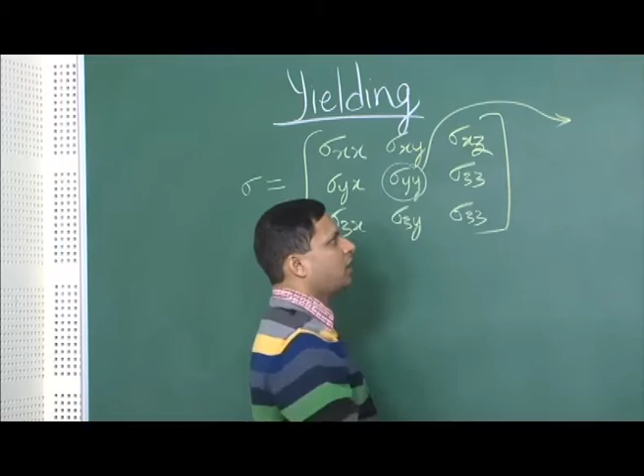Now, when we are talking about a simple tensile deformation condition, only one quantity exists, sigma yy, and we know from our simple tensile test that when this value reaches y, the yield strength of the material, then we say the material has started to deform. But how do we talk about yielding or the initiation of plastic deformation when more than one of the components of this matrix is non-zero? In this particular case only this was non-zero, everything else was 0.

What about if more than one term is non-zero? Let us say this is non-zero and there are some more 2 or 3 terms which are non-zero, then how do we define that deformation has started or begun?

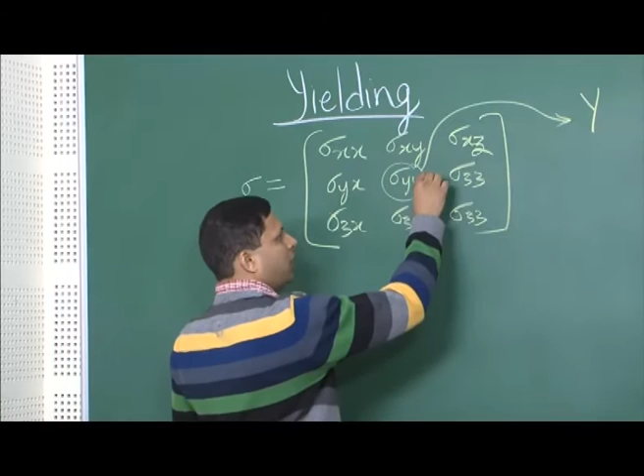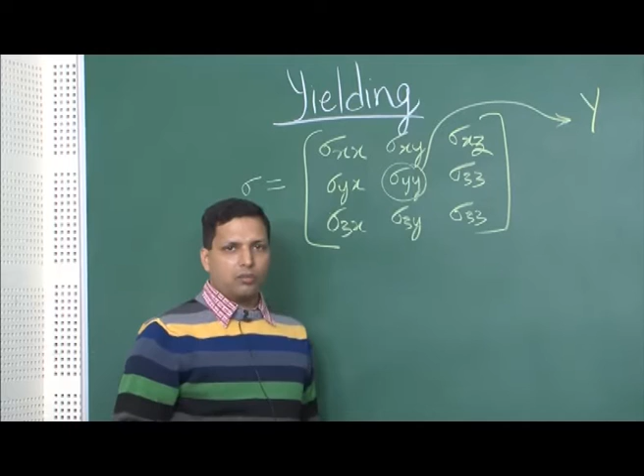Either you can think of a very simplistic model where you would say each of these values should reach a certain point, and then we will be in a position to say that yielding has begun, but that is not corroborated by our experimental results.

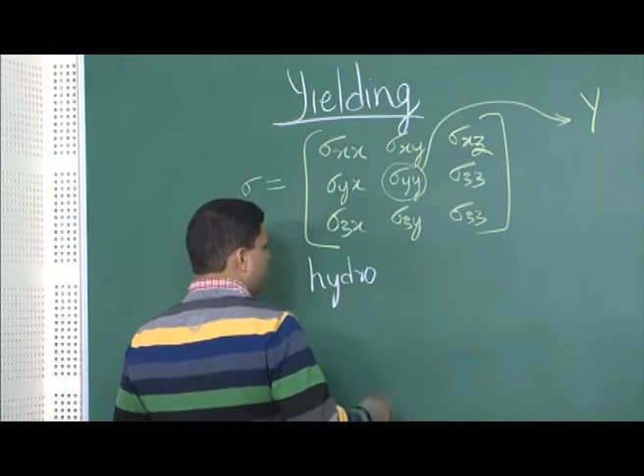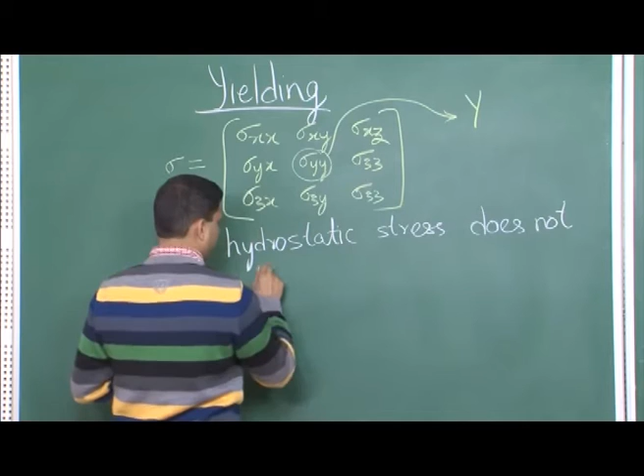Experimental results have shown us that it is a hydrostatic stress, so the hydrostatic stress does not influence yielding. And only the overall shear stress, not a component, is what influences yielding.

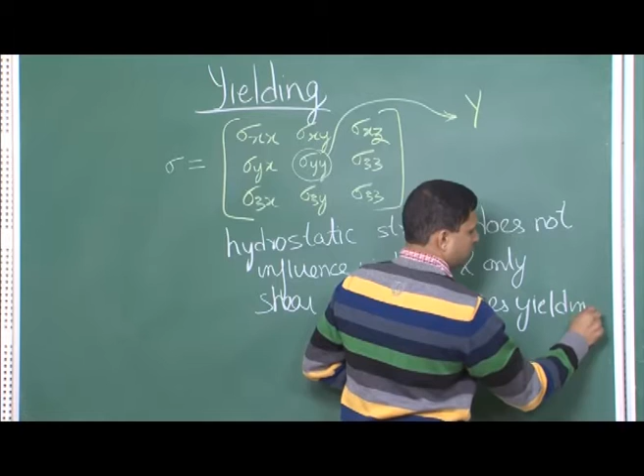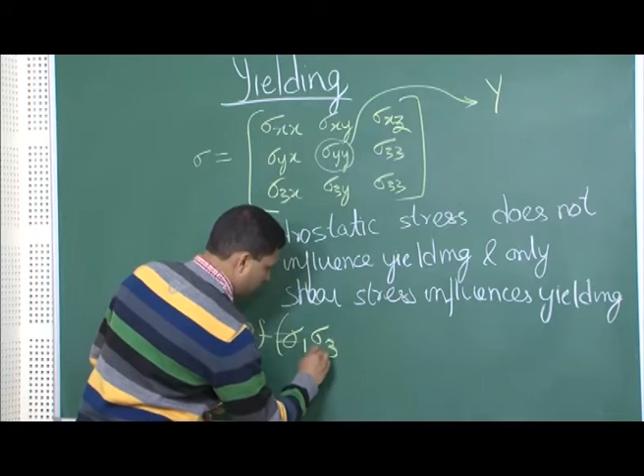If we take this statement into account, then we can say that this function, which is a function of shear stress, let us not write it as like this: sigma 1 minus sigma 2, sigma 2 minus sigma 3 and sigma 3 minus sigma 1.

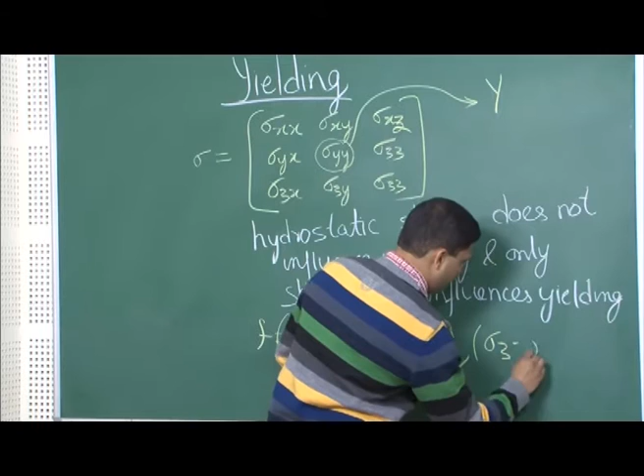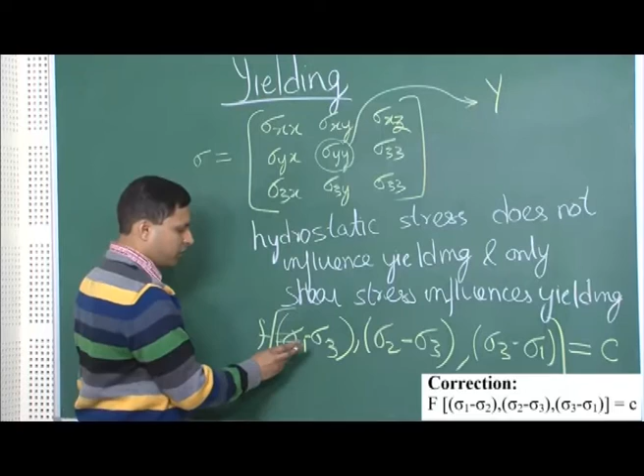When this function reaches some critical value c, we do not know what this function is right now, but all we know is that it has to be a function of shear stresses, and if we look at the shear stresses in terms of principal stresses, then sigma 1 minus sigma 2, sigma 2 minus sigma 3, and sigma 3 minus sigma 1 all represent the 3 shear stress components.

So now we have a form of the equation in terms of shear stresses, and when this function reaches a critical value c, then we will say that this is plastically deforming, or yielding.

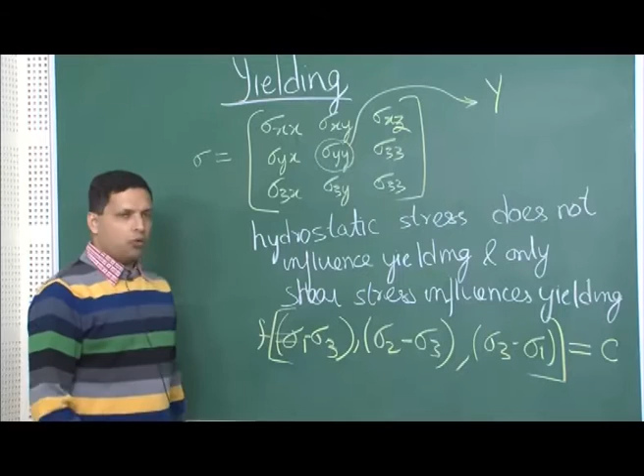Now the next task is to find out what this function is, which has to reach this critical value. We know it is a function of shear stresses, but we still do not know the exact function, and to get to that exact function we will have to put some constraints, get a formulation, and then verify empirically whether this particular criterion holds true or not.

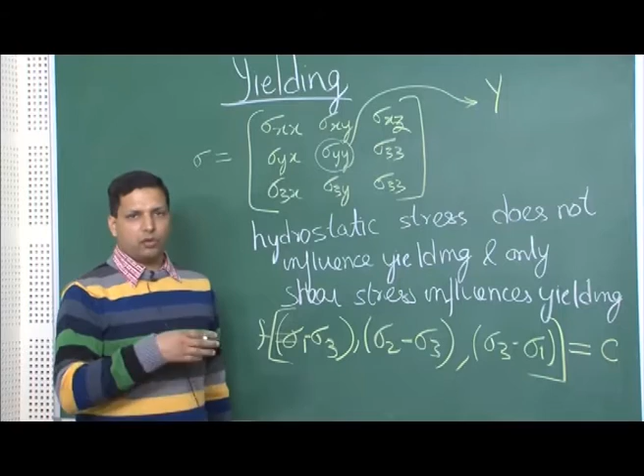It may be that certain materials will follow one kind of criterion, other materials will follow another kind of criterion. So coming back to certain assumptions, what are those assumptions or constraints that we need to put so that we can formulate some criterions?

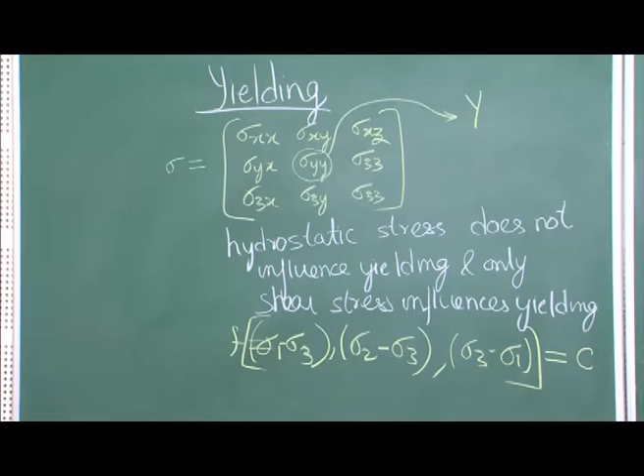First and foremost is no Bauschinger condition or no Bauschinger effect. What is the Bauschinger effect? It is when you have different behavior in tension and different behavior in compression. So what we are saying is that it should not be there, meaning behavior should be similar whether we are talking about compressive or tensile, and that would mean that the relation we get will be symmetric with respect to plus or minus sign, because plus and minus sign are what reflect whether it is a tensile or compressive stress.

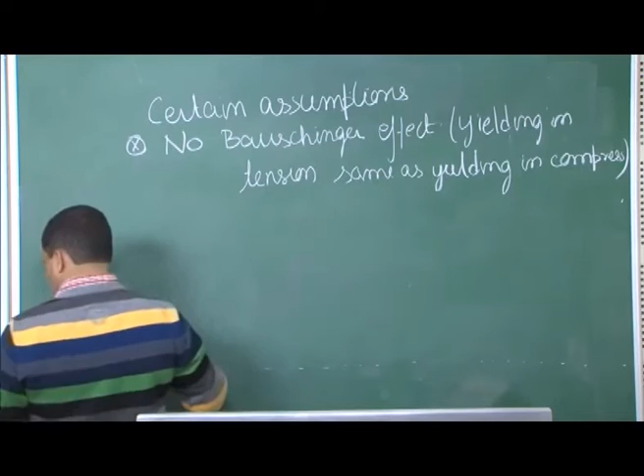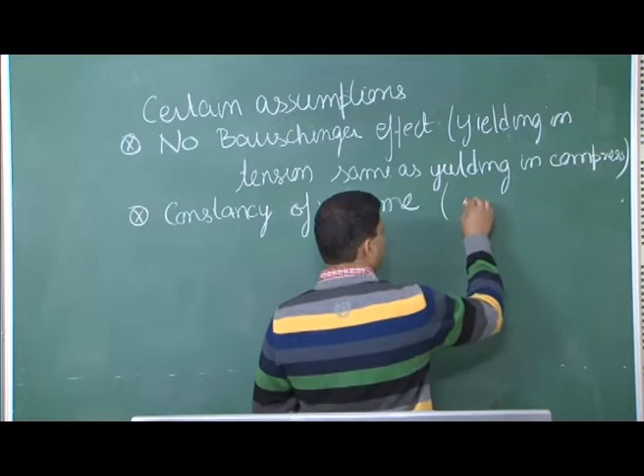What is the other assumption? It is non-compressibility, or constancy of volume. So we are assuming it is plastic deformation and a material which does not compress upon deformation. Therefore, if you look at the total change in volume, it should be 0, and from that you can easily show that Poisson's ratio should come out to be 0.5.

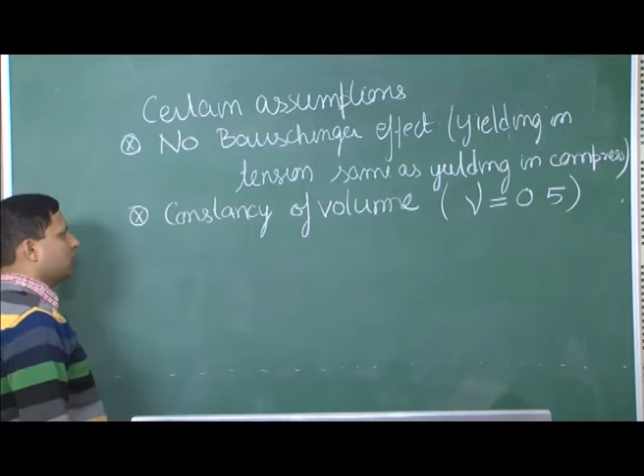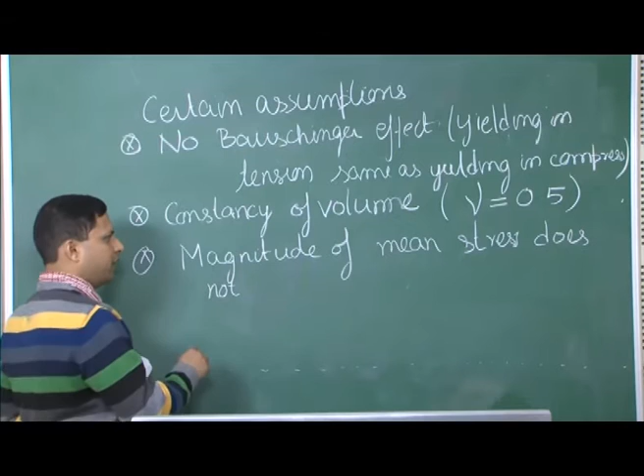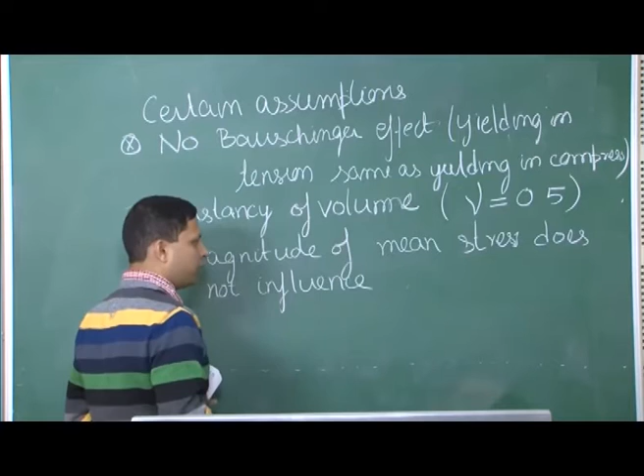And we will actually look at one example to understand this. So this is another constraint, and the other is that the magnitude of mean stress does not influence yielding. Now we have already stated it in a much more general way, but to formulate this relation we are taking a more defined approach and saying that magnitude of mean stress does not influence yielding. We have already said that hydrostatic stress should not influence yielding, and now we are putting it in a more specific term that mean stress should not influence yielding.

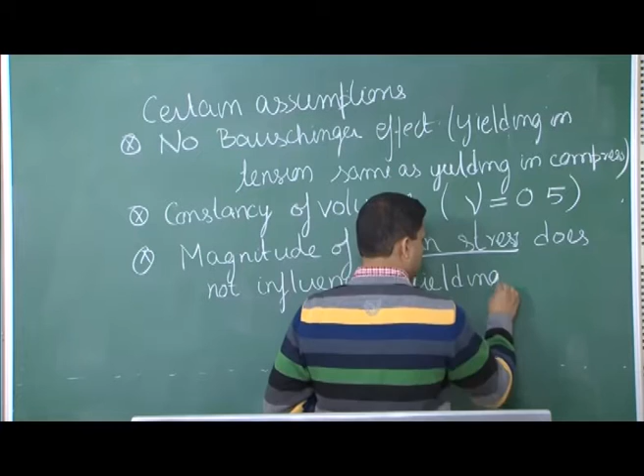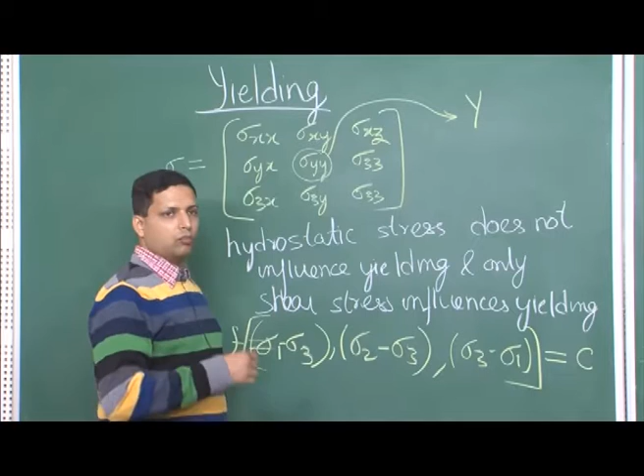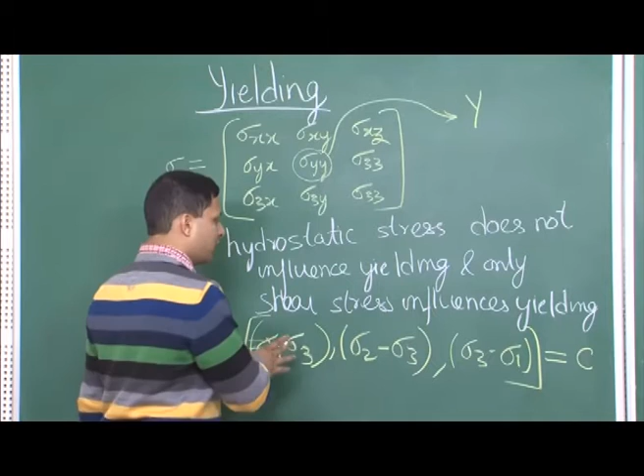So, if we take these into consideration, and the fact that we already know it is a function of shear stresses, we have a few more things to say. Before we put those constraints formally, let us look at what the Mohr circle will say about the constraints we have put, about the fact that the magnitude of mean stress does not influence yielding, or that hydrostatic stress does not influence yielding.

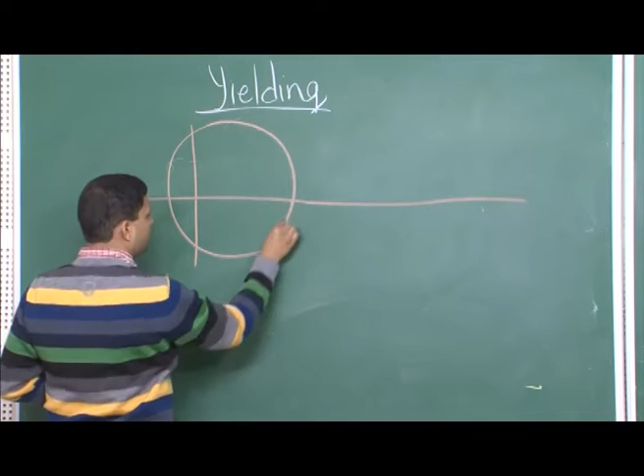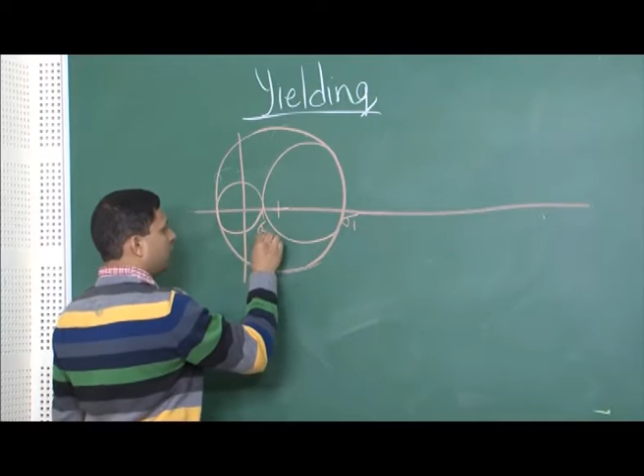So let us look at a simple Mohr circle to explain what we have just written. All the talk we have covered can be much more simply represented, as we have done earlier, by a simple Mohr circle. Let us say this is a Mohr circle representing the yielding condition, at this particular condition it is yielding, and there are multi-axial stresses, so we are drawing 3 circles. Now there is sigma 1 over here, sigma 2 over here, and sigma 3 over here.

Now, what is the hydrostatic stress? It is the sigma xx, sigma yy and sigma zz, and the mean of these we can find out very easily. For example, if we are talking about stresses in this direction, the mean of this will be... okay, so this is the element where we have this particular stress condition.

Now, if this same element were also imposed with some additional hydrostatic stress, let us say this is sigma m equal to this. So now each of these stresses is added by this amount sigma m, and let us say it has now moved to over here.

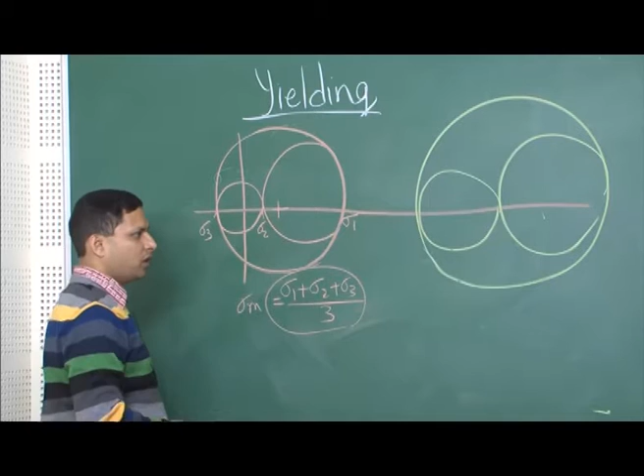So the size of the circle remains the same. Even though the drawing may not be able to convey it accurately, remember this circle is the same in diameter as this one and this one. Just keep in mind we are trying to draw it on the board, so it may not come out accurately, but the fact is that the size of the circle remains the same. Only the overall placement of the circle has changed—the circle was placed over here and now it is placed over here, everything else remains the same.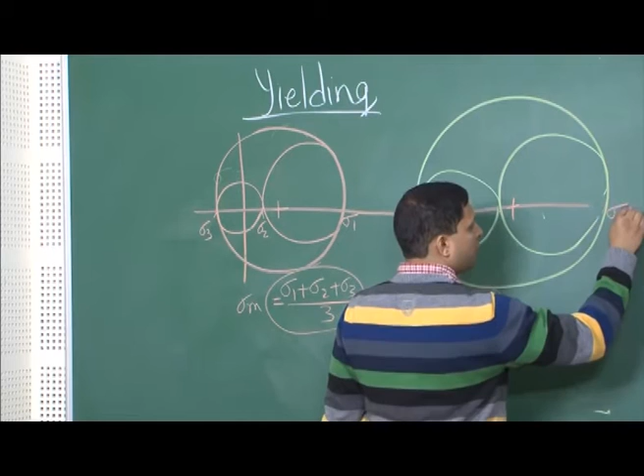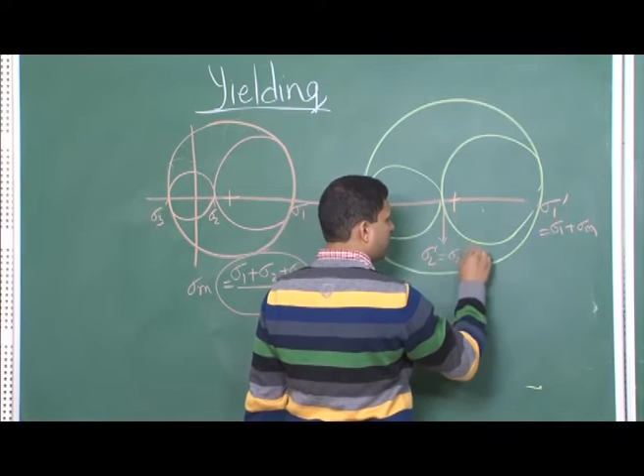So now similarly here, this is your new sigma 1 prime which is equal to sigma 1 plus sigma m. Similarly, this is sigma 2 prime which is equal to sigma 2 plus sigma m, and this is sigma 3 prime which is equal to sigma 3 plus sigma m.

Now, what all of this means, in simple words, is that if yielding is taking place over here, it is also taking place for this one. If yielding is not taking place here, yielding will not take place even for this condition. So just imagine, let us say yielding is not taking place and sigma 1, sigma 2, sigma 3 are some values. Now you have increased those values by a significant fraction.

You can keep increasing it no matter what, as long as continuum mechanics holds for that stress, which would mean you can keep shifting this circle all the way on the positive x-axis, or on the other hand you can keep shifting it in the negative direction where you are applying compressive stresses. So you can keep shifting it in the negative x-direction, but yielding will not take place if yielding is not taking place over here.

So the absolute magnitude of sigma 1, sigma 2 and sigma 3 does not influence the yielding. What is only going to influence the yielding is the size of the circle. Now, as we have already mentioned, the size of the circle is the same here and here, no matter wherever you take it on the x-axis. So as long as the size of the circle is the same, whatever is the yielding state here, it will remain the same for there.

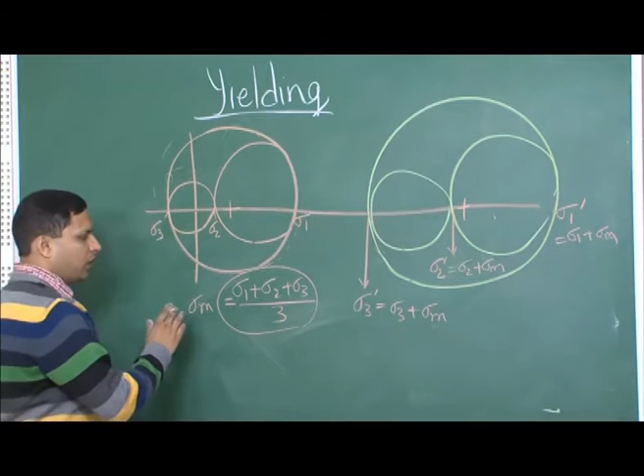If you are changing something which is causing the size change in the diameter of the circle, that is the only thing that can actually change the state of yielding. So let us say we start with a very small circle, yielding is not taking place. Keep increasing it, and there may be some critical size at which yielding takes place. As soon as the circle size reaches this value, the material starts to deform plastically, and anything beyond that, the material has yielded. So what we can say is that it is the size of the circle that determines yielding.

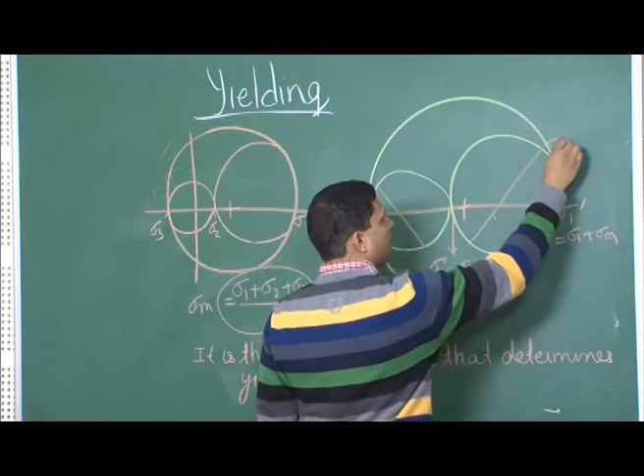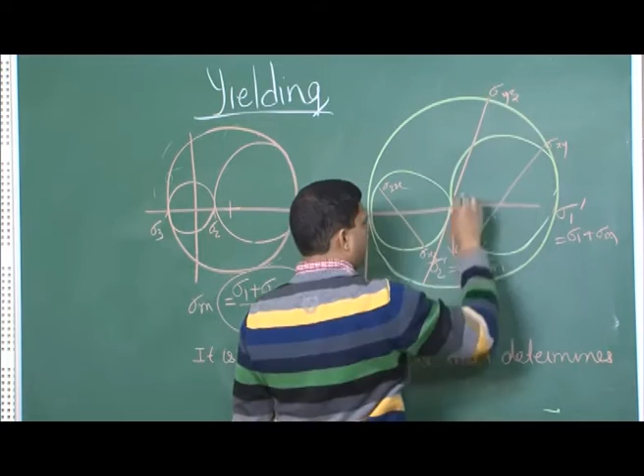Remember, if you keep moving it, if you keep the placement different and keep the size same, nothing is changing in terms of yielding. Although the absolute value of hydrostatic stresses has increased, you have added some quantity sigma m to all the principal stresses, or it may even be at some particular angle, so you may have sigma xy, sigma yx, sigma xz, sigma zx, and similarly sigma yz and sigma zy. All those stresses would have increased in value, the normal stresses have increased in value, but the yielding condition has not changed.

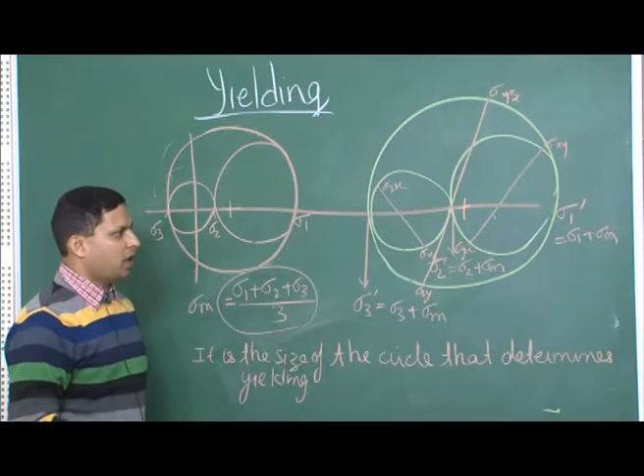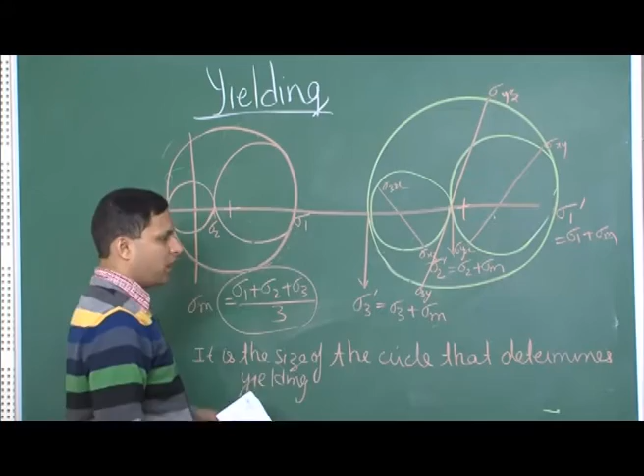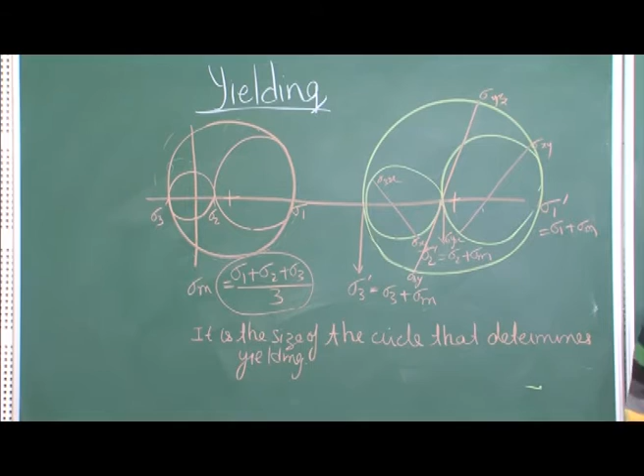That is a very important understanding, and now based on this we will look at two different yielding criteria. Like we said earlier, yielding is defined by the difference between the principal stresses, because difference between the principal stresses are nothing but shear stresses. So we have said F, sigma 1 minus sigma 2, should reach some critical value. This is what we have done so far.

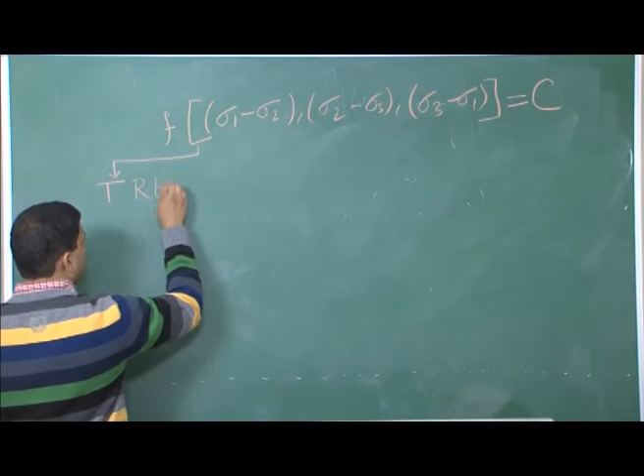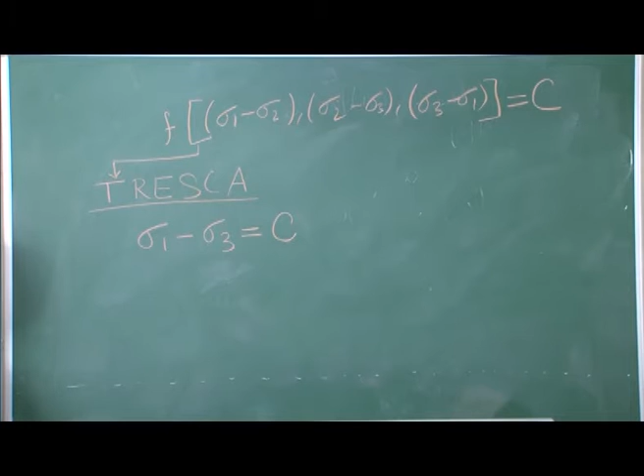Now people have come up with two different criteria. One of them is called Tresca, and like I said, you can come up with any number of criteria, and maybe different materials will follow different criteria, as long as they follow some of those constraints and the fact that mean stresses should not influence yielding. So what is the Tresca criterion? The Tresca criterion says that when sigma 1 minus sigma 3 reaches a critical value C, yielding will start to take place. So this is the defining equation for the Tresca criterion.

Now, as of now we do not know C, we do not know how to relate it with other known properties of the material. For example, you can do a simple tensile test and get the yield strength of the material. You can do a simple shear test and get the shear strength of the material, given by the symbol K. So how do we relate C with those known quantities of the material, and what will be that C value? To do that, we will simply take a tensile condition, put the material in a tensile test, and find out the value of sigma 1 and sigma 3 in terms of y, and put it over here.

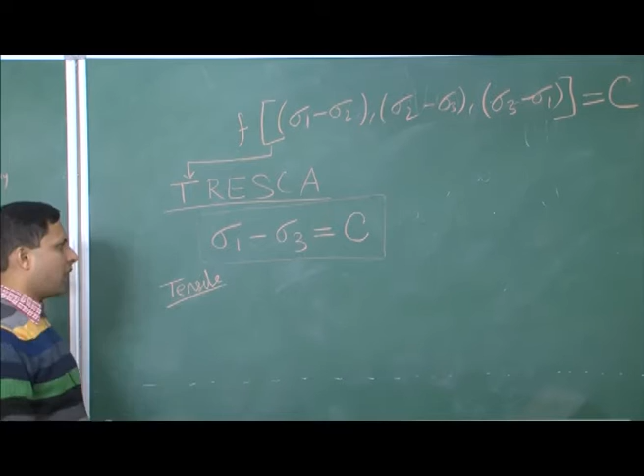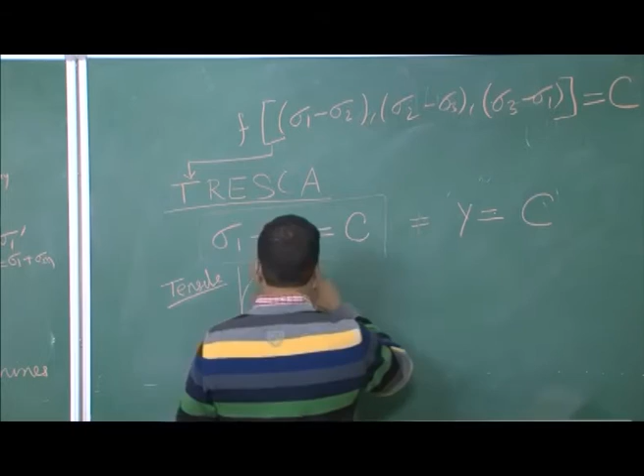When we are doing the tensile test and the material has just begun to yield, what will be the sigma 1 value? If we draw the Mohr circle, this is how it will look. If it has just started, this is sigma 1, and this will be your sigma 2 equal to sigma 3, which will be equal to 0. If it has just begun to yield, then this value must be equal to y. So now let us put this over here, and we see that y is equal to C, sigma 1 is y, sigma 3 is 0. So you put this over here, and this implies that C is equal to y.

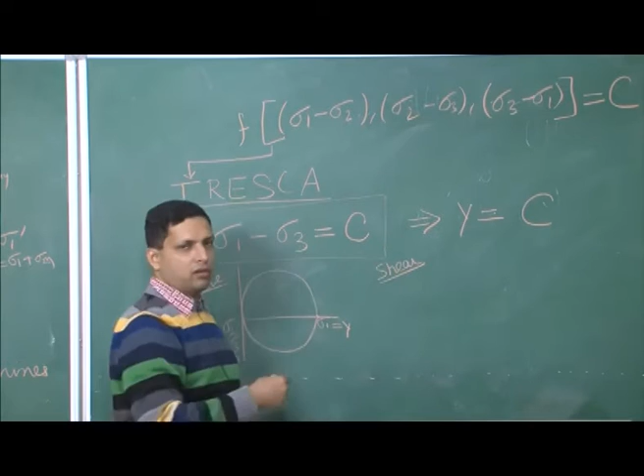The other is you take a shear stress test of the material. Now what we are trying to do is relate the value of C in terms of the shear strength. So y is our yield strength and K will be our shear strength. So now we are doing a shear test, shear stress of the material.

Again we draw the Mohr circle like this. This is sigma 1, this is sigma 2, this is sigma 3, and if the material is just about to yield, then this value must be K, because this is the shear stress and this is symmetric. So this must be equal to K, and this must be equal to minus K.

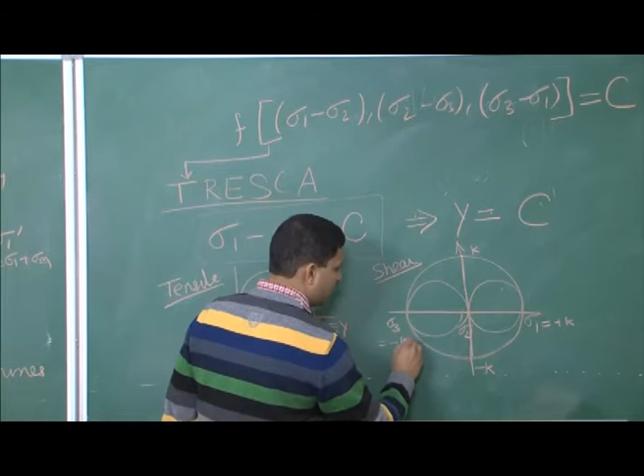So the radius is K, which means sigma 1, which is also equal to the radius, should equal plus K, and sigma 3, which is equal to minus K, is also equal to radius but in the negative direction. So this is minus K. If we put this over here, what we get is K minus minus K equal to C, which is 2K equal to C.

So when using the Tresca criterion, we get not only the value of C in terms of y and in terms of K, we also get the relation between y and K, which is y equal to 2K.

So this is one criterion to define the plasticity, the onset of plasticity in the material. Now we will move on to another criterion, which is called the von Mises criterion. So one was the Tresca, now the second one we are looking at is the von Mises criterion.

The Tresca criterion, as we saw, is very simple - it is just saying sigma 1 minus sigma 3 equal to C. But in the von Mises it is a little bit more involved. What it is saying is that when the RMS, that is root mean square value of shear stresses, reaches a critical value.

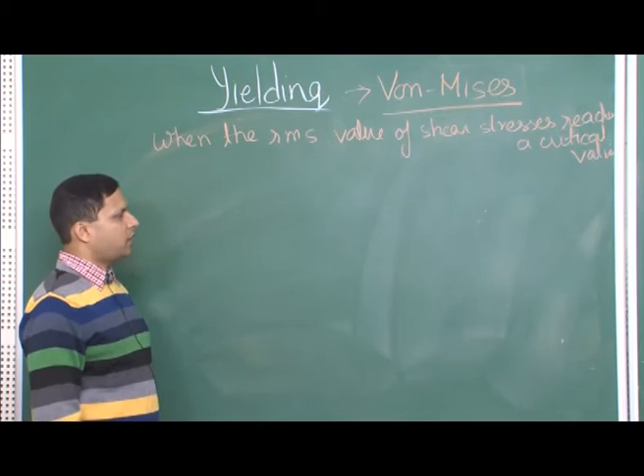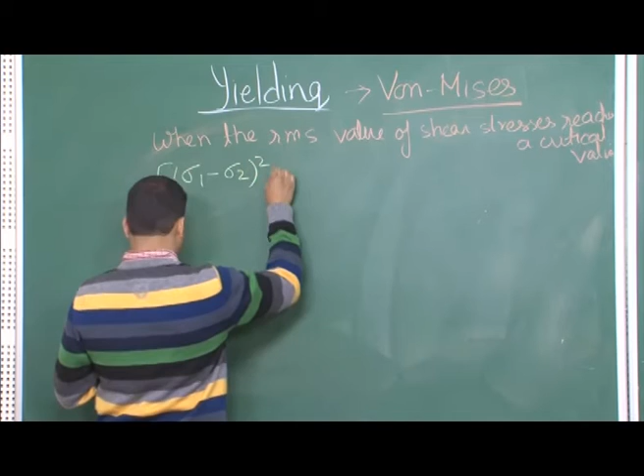So we looked at the Tresca and this is the von Mises criterion. What the von Mises criterion is saying is that when the root mean square value of shear stresses reaches a critical value. So now let us put it mathematically. This is how we will represent it.

So this particular quantity on the left hand side should reach some critical value C, a constant. So no matter what the stress condition is, as long as it is the same material, if you take out this particular function value, that function value should reach this constant C, and once it reaches C, you can say that plastic deformation has begun. So this is the onset of plasticity as defined by von Mises.

Now what you will again see is that we have taken the quantities in terms of sigma 1 minus sigma 2, sigma 2 minus sigma 3, and sigma 3 minus sigma 1, and not as absolute quantities sigma 1, 2, 3. Again that is related to the fact that hydrostatic stresses do not influence yielding - what influences yielding are shear stresses. If you remember from the Mohr circle, these are nothing but shear stresses, the three different shear stress components.

In the Tresca, it is concerned with only one kind of shear stress, the largest shear stress, because we are looking at sigma 1 minus sigma 3. But in von Mises, we are saying that all the shear stresses make a difference, and we have formulated the relation based on that. Now let me call this C prime instead of C, for a reason.

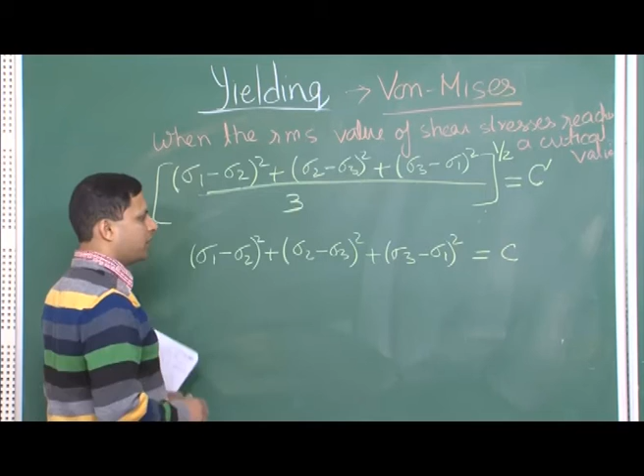Here we have the form of the equation, but what we do not have is the value of C. More importantly, like in the previous case, we would like to relate C to the yield strength of the material and the shear strength of the material. So let us look at the value of C.

To do that, all you need to do is take the tensile stress condition. If you take tensile stress condition, your sigma 1 is equal to y, sigma 2 is equal to 0, and sigma 3 is equal to 0. So we have these values, you insert them over here, and what we get is y squared plus y squared, which is equal to 2y squared, is equal to this constant C.

So we have found the value of C in terms of the yield strength of the material. Yield strength can be found easily by a simple tensile test. Now see the significance of this equation: yield strength is easily obtained, but in real deformation the material may be exposed to different multi-axial stresses. Using those stress values of sigma 1, 2, 3 in this equation, along with the known value of C equal to 2y squared, you can determine whether a particular element will start to yield.

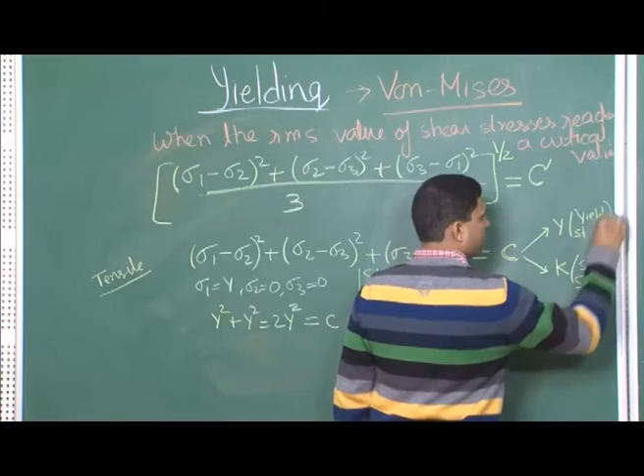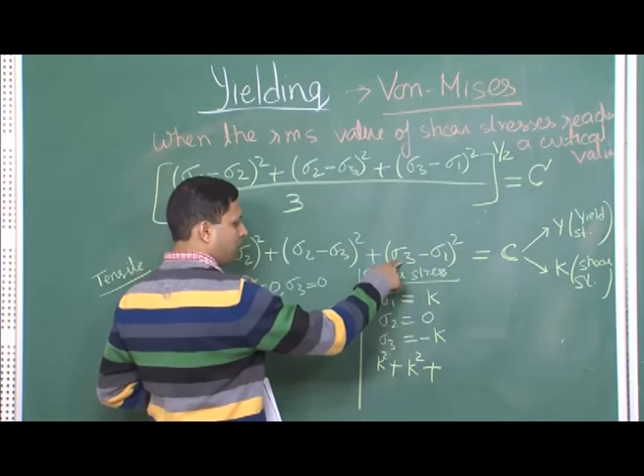Now here, like in the previous case, sigma 1 will be equal to k, sigma 2 will be equal to 0, sigma 3 will again be equal to minus k. Putting this in, sigma 1 minus sigma 2 equals k squared. Sigma 2 minus sigma 3 is k squared again, and sigma 3 minus sigma 1 is minus 2k, or 4k squared, equal to C. So 6k squared is equal to C.

Now we have two relations, one in terms of yield strength, the other in terms of shear strength. We can combine these two to get a relation between yield strength and shear strength. So what is that? 2y squared is equal to 6k squared, which means y is equal to root 3 k.

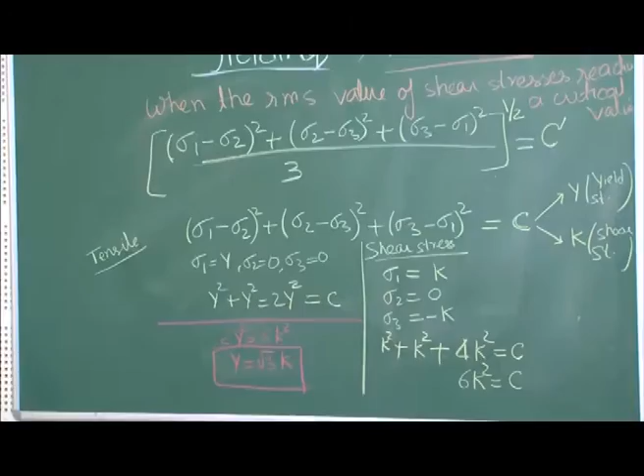So if you are using the von Mises criterion, it says that in this condition, yield strength y equals root 3 times the shear strength k. On the other hand, when using the Tresca criterion, y is equal to 2k. It's a minor difference but still significant: one is 2k, the other is root 3, which is 1.732. So here y equals 1.732k, and there y equals 2k.

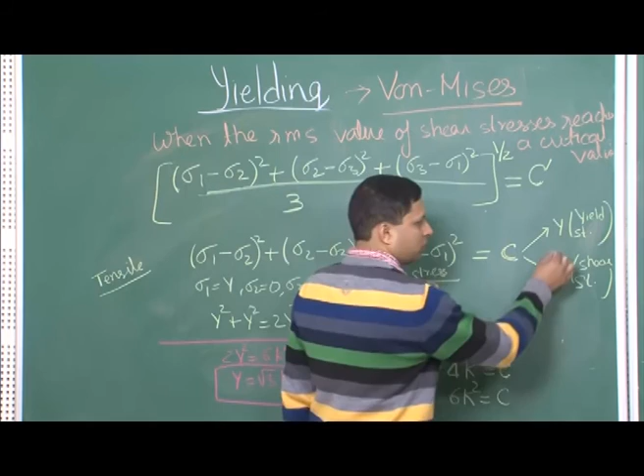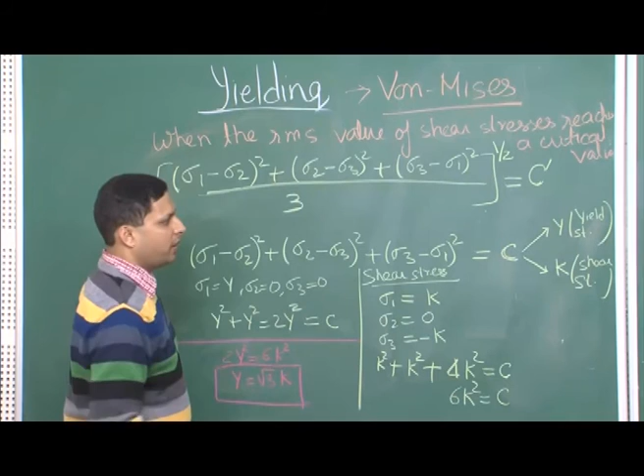These are two of the most widely used criteria to describe the onset of plasticity under different multi-axial stresses. The best part is that you can define the onset of plasticity in terms of properties that are easy to extract, like yield strength or shear strength. In both cases we relate C with y and k, and no matter what multi-axial stresses are present—whether all 9 components or just 4—you can determine whether the material will deform under that stress condition.

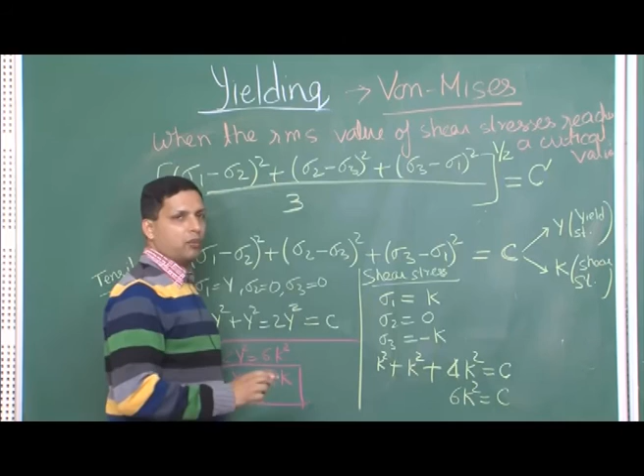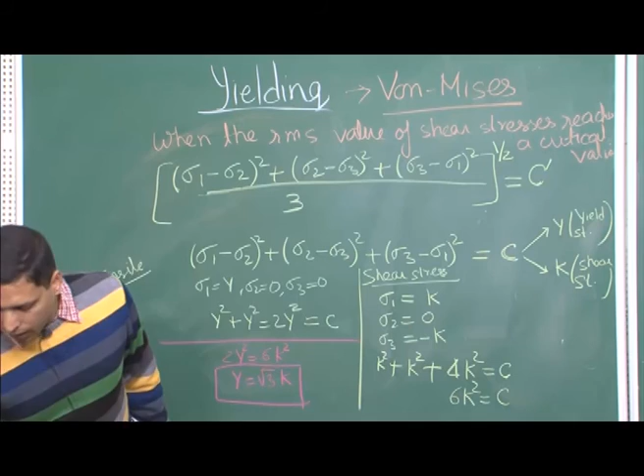Okay, so now we have looked at two examples for the yield criterion. It's time we look at one example, and I will leave you with a question today. A new yielding criterion is defined. Those are the two we covered, and they are not the only two—you can come up with as many as possible, but you will have to cross check that it satisfies all our assumptions and that it is empirically valid.

So a new yielding criterion is defined as sigma 1 squared plus sigma 3 squared equal to C. This is the yielding criterion I am defining for you. Now what you have to do is first find C in terms of y and k, where y is the yield strength and k is the shear strength. Second, verify the validity of the criterion.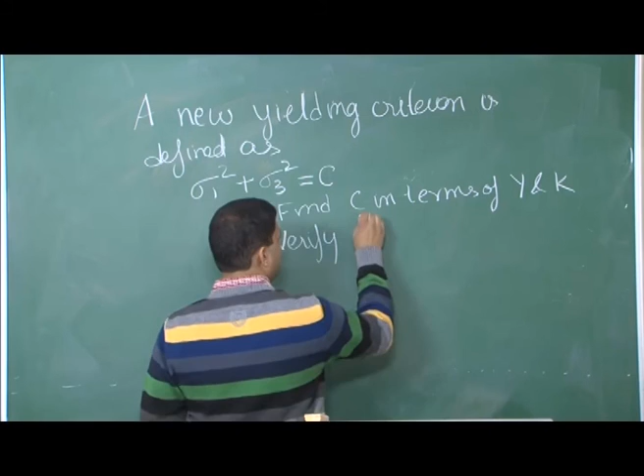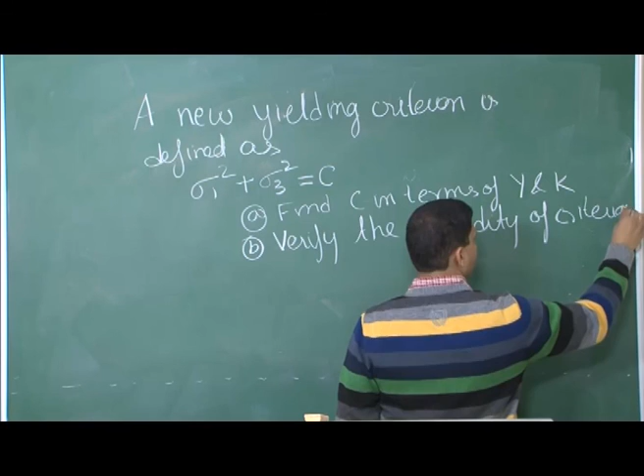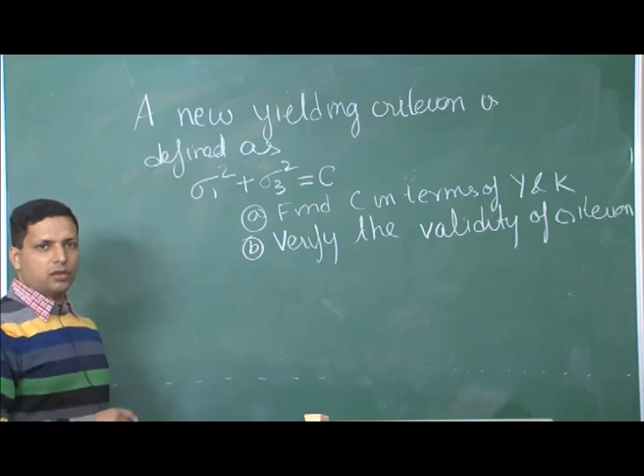Before you get to the solution, I would request you to spend some time and try to solve this. This is a very straightforward problem, and you should be able to do it in 5 to 10 minutes. So I will leave you with this question, and we will come back to the solution in the next class. Thank you.